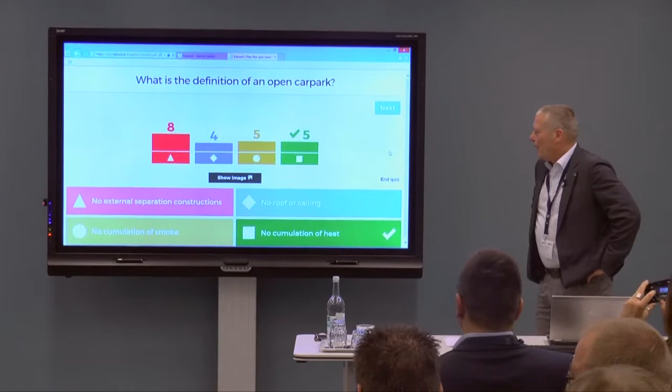Okay, well, most of you think, and that's not strange, no external separation constructions, because they are very much related to each other. No external separation constructions means also no accumulation of heat, of course, and maybe no accumulation of smoke.

I think my answer would be no accumulation of heat, because if we don't have accumulation of heat, then we can create boundary conditions that prevent a developing fire to develop to a flashover. So then we keep a localized fire, and that is much like a fire in the outdoor. An indoor fire is different from an outdoor fire because flashover could happen. If you can prevent flashover, well, that could be a definition of an open car park.

If you think about no accumulation of smoke, then you are thinking about personal safety, I guess. And well, that's also a good reason for a definition of an open car park. But then it's not the definition of the developing of a fire. Then you are thinking about personal safety and inhalation of smoke and visibility, etc. Okay.

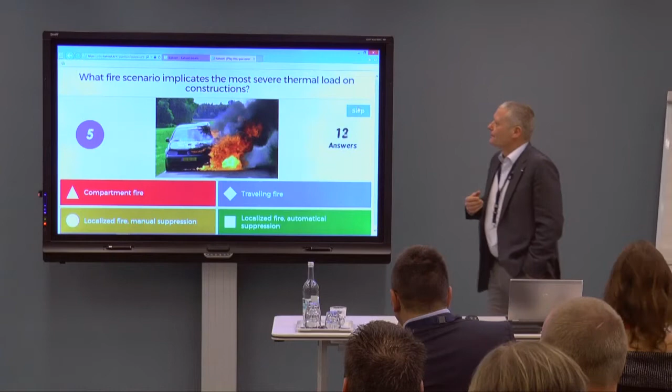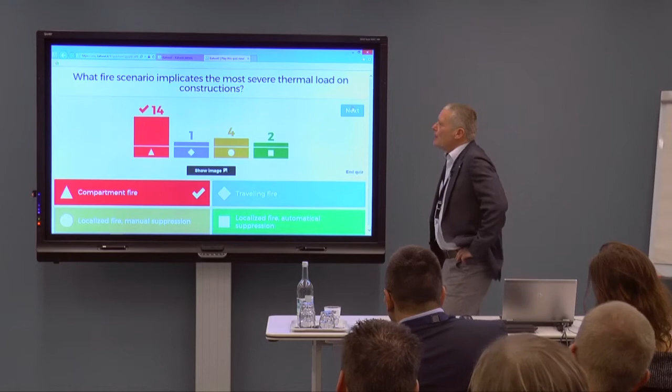Again, scoreboard. What fire scenario implicates the most severe thermal load on constructions? Well, here you see the same scenarios, but then in the localized fire, I made the difference between manual suppression and automatic suppression, compartment fire, traveling fire. Well, I'm curious about your answers. Time up. Not everyone managed that in time. Yeah, most of you think the compartment fire, and I think I agree on that.

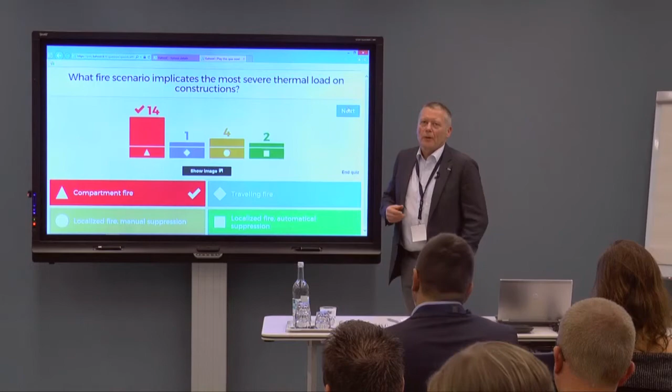The compartment fire is the most severe thermal load, not only when it comes to temperature and duration of the fire, but also because a large part of the construction is exposed to that thermal load. When you have to deal with a traveling fire or a localized fire, then only a small part of the construction is exposed to that thermal load. And that means that also the failure probability is much lower than when it's a large part of the load-bearing elements. So I agree on that, I think the compartment fire is the most severe thermal load.

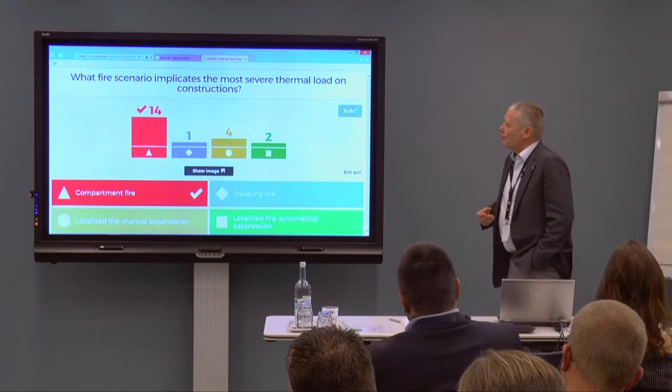Oh, again, scoreboard. The last question, what type of cars implicates the most severe fire scenario? The fire scenario is important because the rate of heat release, that's basically the engine of the temperature development in the compartment. Is it normal petrol or diesel cars, electrical cars, hydrogen cars or LPG cars? And, well, there are of course maybe some more types. I think this is a difficult question to answer. I find it a difficult question to answer, at least.

You see, I think we have to wait a few seconds.

That's not officially published yet, but from the research you could conclude, and there are 4 tests on 2 types of these cars, that the modern cars, electric, hydrogen, and LPG, are not more severe than the old cars. It's only more difficult. That's hopeful.

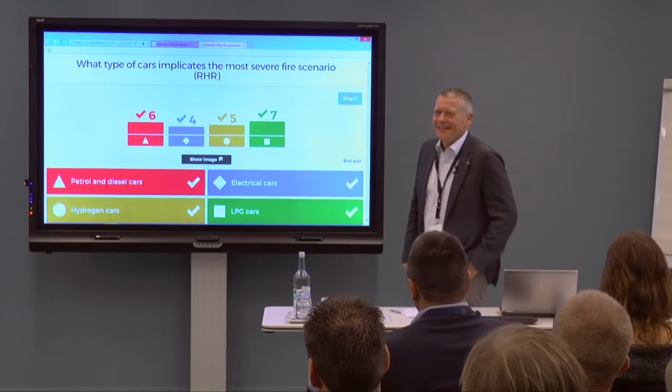Yeah, because what we saw this morning, I really don't know what's the most severe scenario. But if there are tests, not published yet, and those tests show that electrical cars, hydrogen cars, and LPG cars are not more severe in a fire scenario than normal petrol and diesel cars, well, I think that's hopeful, because then maybe we are now calculating conservatively. That would be nice.

So you are very divided, and that's for me too. I really don't know, because even if we think petrol and diesel cars give the most severe thermal load, we still don't know how the development in the future will be. We don't know how many plastics, how car design will be in the future. So there will always be a lot of uncertainty in the rate of heat release scenario.

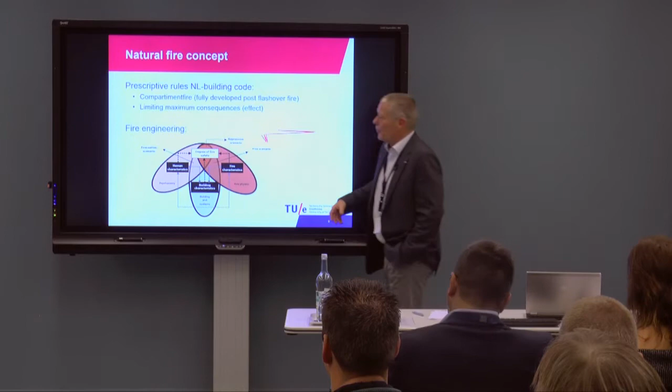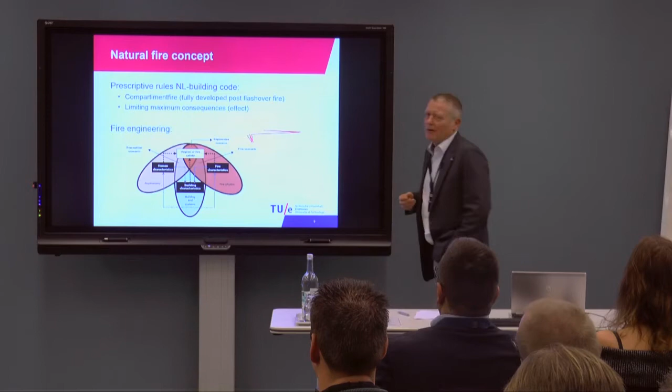Besides building characteristics and fire characteristics, of course human characteristics are also important: the physiological effects on skin, inhalation of smoke, etc., but also organization. That's especially important for personal safety. I think you understand that, and maybe you have seen this figure before. This is a popular picture showing what fire safety engineering is, that we have three kinds of boundary conditions that are important for a project-specific solution.

Oh, I have to do this.

Okay, then we go to the car parks. A car park is maybe a very simple building, but what we know in the building is the fire scenario, or more or less we know the fire scenario. And that means that this building type is especially suitable for fire safety engineering, because if you can define the natural fire, then you can engineer safety in a proper way.

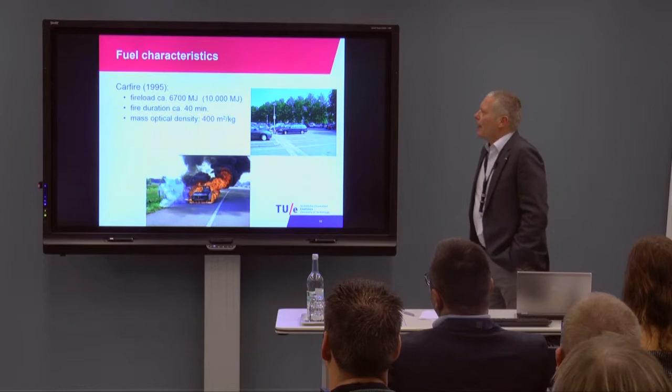Long ago I made a fire safety concept for NedCar. That was in 1995 in Born. In that time you had the Volvo 440, 460, 480, very old type, but then that was the standard mid-class car. And because they were assembling that type of car, they knew exactly what materials were in that car. So I could exactly establish the fire load of one car.

So this is a kind of mean value of the Volvo 440, 460, 480 as the fire load for one car, 10,000 megajoules. And that's not the fire load that we calculate when it comes to the fire scenario of a car. Because if we take a look, and that is the next slide, at the rate of heat release scenario, you see that the total fire load is less than 10,000 megajoules, approximately 6,700 megajoules. So that means that we have an efficiency of combustion of 67%.

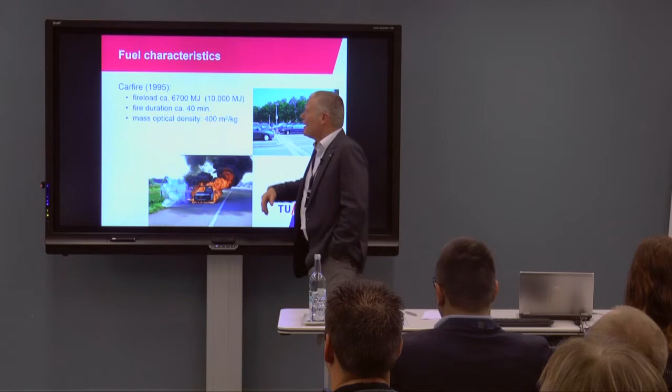So that's not a very high efficiency, but okay, maybe. So you can ask for yourself: is this a conservative assumption? I'm not sure about that. Fire duration approximately 40 minutes, and the mass optical density, so smoke production, of 400 square meters per kilogram.

And to make a comparison with normal building fires, in normal building fires we assume a smoke production, a mass optical density, of approximately 100 square meters per kilogram. So this is 4 times higher. But I think you can imagine why that is 4 times higher. That's because of the use of plastics and the tires of the cars that produce a lot of black smoke.

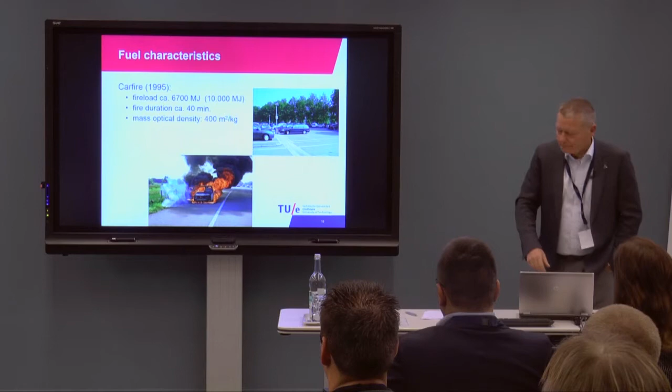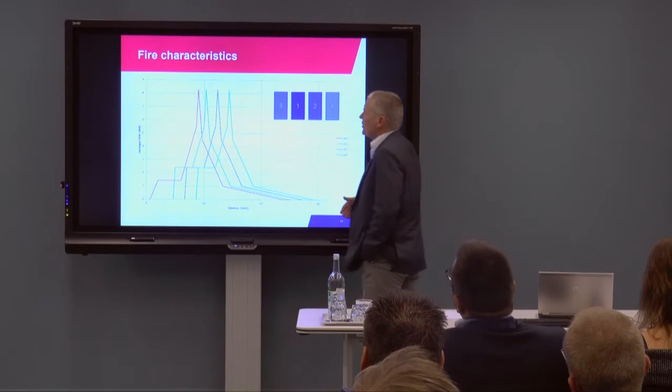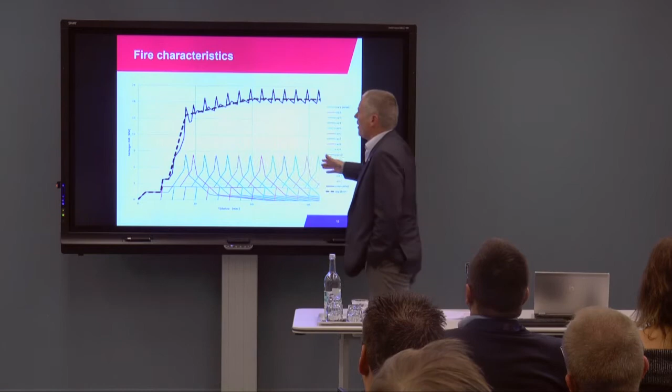So you see ignition of car 2, of car 3, with constant time interval. And if you don't put out the fire, then it won't be 4 cars, but maybe a complete row of cars that will catch fire, car after car. I can summarize those scenarios, and that's what I've done in this curve. It's basically the summarization of all those separate scenarios. The dotted line is basically the global rate of heat release, and what you get here is a kind of a traveling fire.

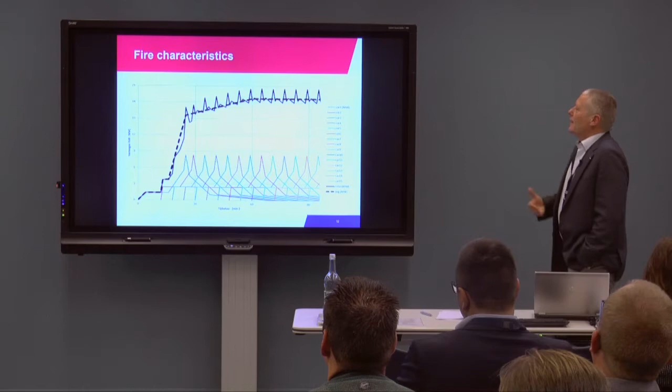So we see that car 1 is finished after 40 minutes, and at that moment we have 4 cars on fire, maybe already the 5th car, and that means that we have a more or less constant fire size of approximately 4 or 5 cars, moving through the row of parked cars, but more or less constant in size. After approximately 60 minutes, we have a constant rate of heat release. And it's a rather high rate of heat release, approximately 18.5, 19 megawatts. But that's the rate of heat release of a traveling fire.

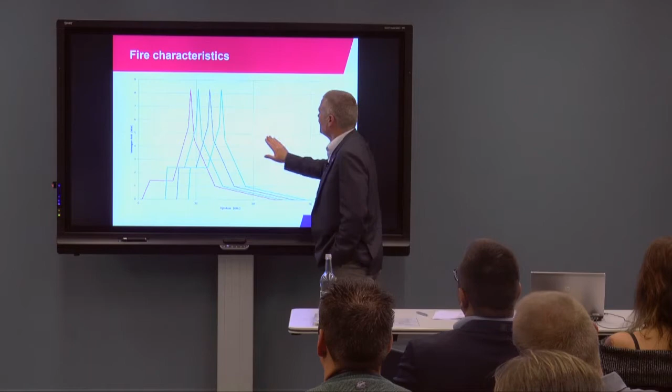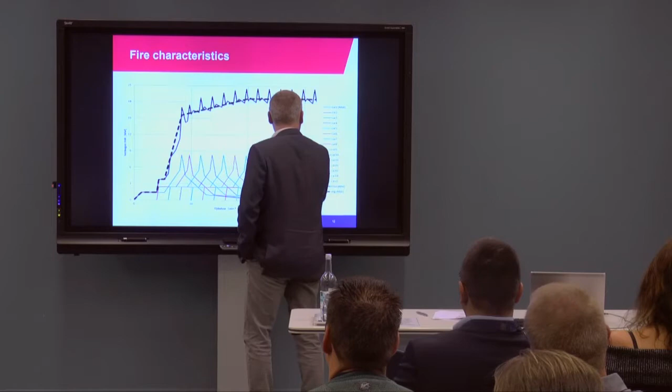Yeah. I'm going back now. That's not good. Yeah. What's the problem with that? Okay. I don't know. Is it the next sheet, or am I already 5 sheets ahead now? I don't know. Is it really the next sheet? Yeah, I think so.

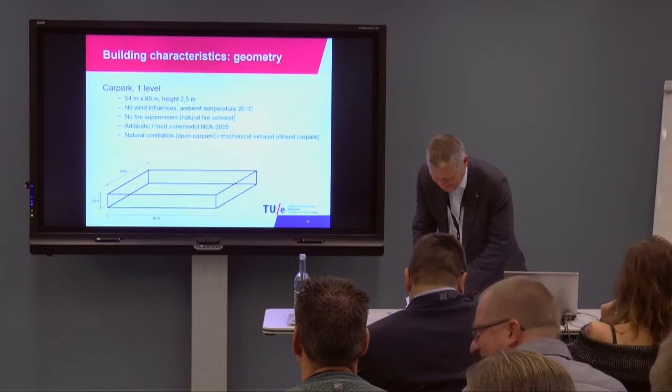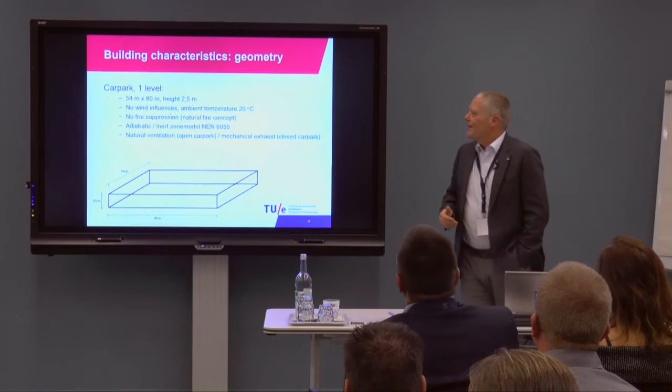Okay, so I have an example to show what the consequences of that rate of heat release are for different types of car parks. The geometry of the car park is very simple. It's a rectangular plan with a constant height. No wind influences, ambient temperature at a constant level. No fire suppression, which means that we follow the natural fire concept. So only the fire and the building are of importance. There's no suppression.

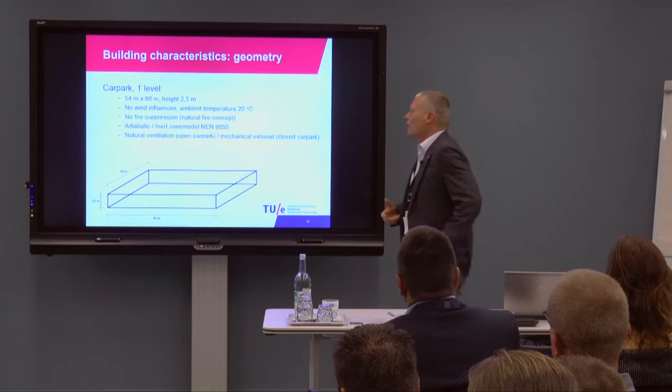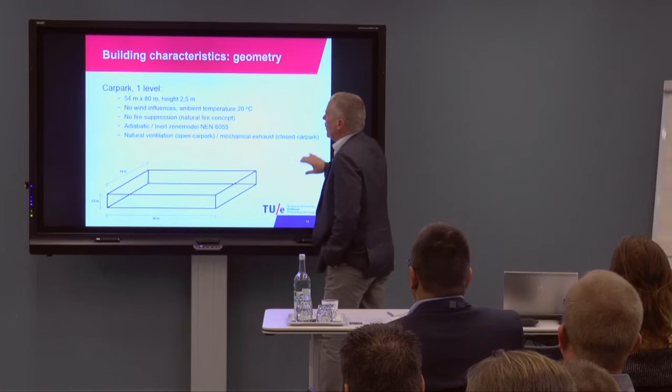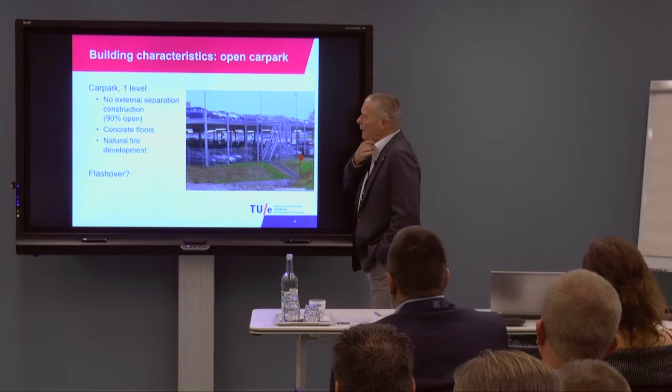I took 2 conditions: an adiabatic condition, that means a very light, very well insulated construction, compared to a very heavy construction with no insulation. And also 2 types of ventilation, an open car park compared to a closed car park. We did that with simple zone modeling. Of course that's a very simple approach, but I come to some special localized effects later.

This is an open car park. This is car park Jette in Brussels. It's basically floor above floor, and you see no facades, so no external separation construction, maybe 90% open. Concrete floors, natural fire development. First question: flashover or not? That's the question we already answered in the beginning. We don't expect any flashover here because the car park is too open.

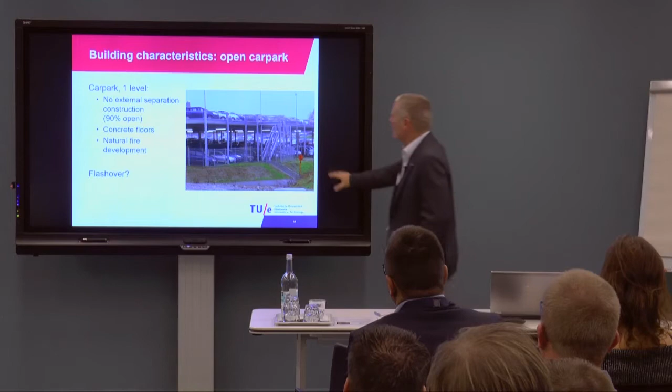Then you can ask yourself, well, is it possible in an open car park to do an offensive fire attack? That means that the fire brigade approaches the fire and puts out the fire. Well, here you see more or less the same graph, in the first hour in this case, and this is the temperature. That's the same as you saw in the graph before. Well, it's now in Kelvin, but that's okay. The same temperature, and I added the visibility line. That is this line, and this is related to the right axis.

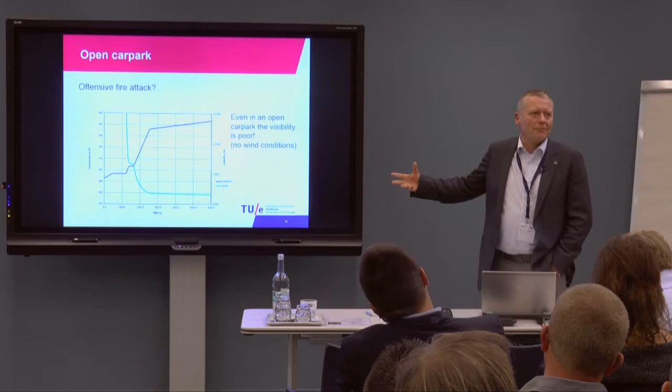So that means that a localized fire scenario in an open car park, in many cases, I think that is a bit too optimistic. I think a traveling localized fire is more probable than a local fire that can be put out by the fire brigade. But is that without systems included? Yeah. Results without systems included? Yeah, this is only the fire and the building construction. So there is no fire brigade, there is no sprinkler installation, there is no smoke ventilation, nothing. It's all natural.

And you see, if you think, well, in that very simple parking, is it possible to do an offensive attack to put out a fire? Not in this scenario, because the visibility is too low. Of course, there are also other scenarios. This is only a design scenario. That means that it's not always this scenario for the fire. It might be a lighter scenario, it might be a more severe scenario. In lighter scenarios, it may be possible to do an offensive attack. So we don't always have the same fire tactics, because we don't have the same fire every time. That's the problem in this case.

But we are very much thinking in only one concept. We are very much thinking of a parking where we reckon on an offensive fire attack, where we always do that offensive fire attack. It's not always possible. Because if there is wind and the wind is from the right direction, it might be possible to do an offensive attack. You don't know what the boundary conditions are, and you are depending on the boundary conditions whether you can do an offensive attack or not.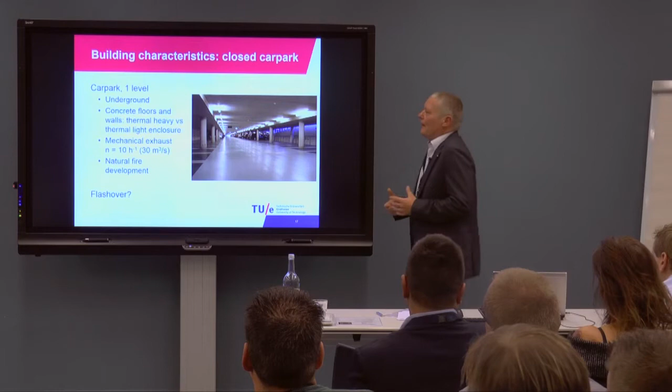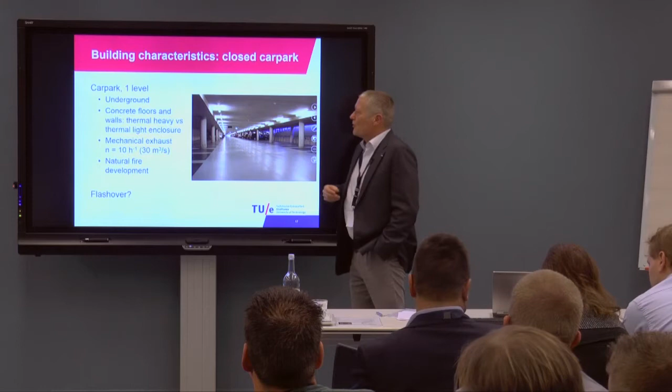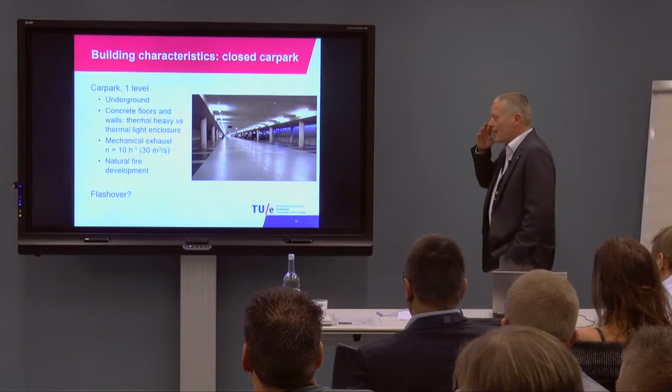The same fire, but now in a different car park. In this case, a closed car park, underground car park, a thermally heavy construction. That means that the gas mass in the parking cools down to the construction, and a kind of basic ventilation, mechanical exhaust of 30 cubic meters per second. That means 10 times ventilation, 10 times per hour. This is rather heavy ventilation system, and also a natural fire development.

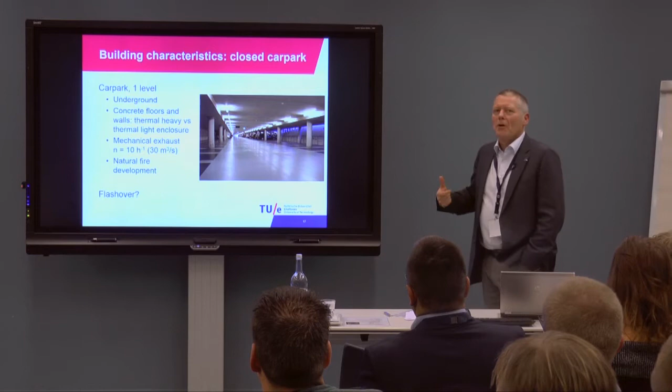Here the same question, the first question, flashover or not in this case? Well, here we were more divided. Some of you think flashover is possible, some of you think, well, I don't know, I think traveling fire. Well, let's see, with zone modeling.

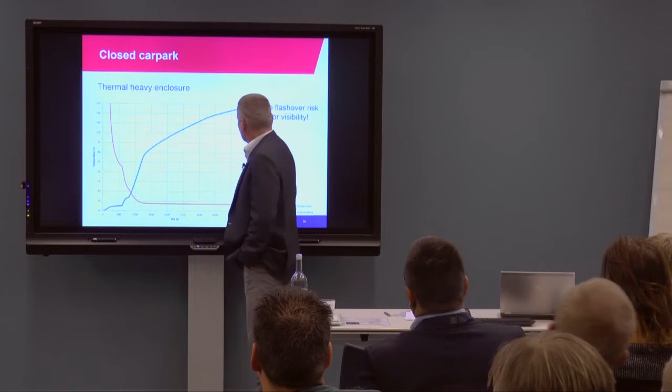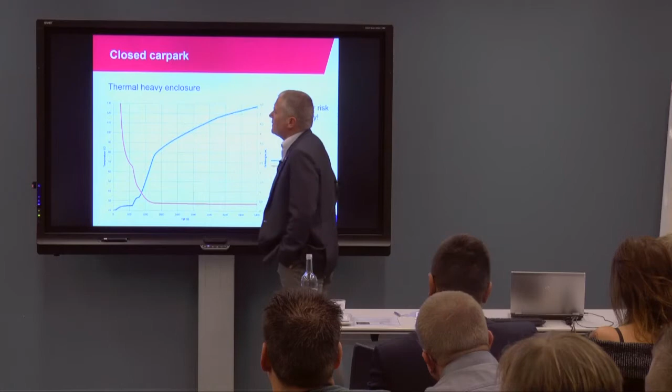You see here, what do you see here? Oh yeah, temperature. Okay, temperature. It's the same fire scenario, the same rate of heat release scenario. Here you see the temperature development, this line, and the temperature is on the left axis. Well, in this case, after 90 minutes, I'm at a temperature level of 128 degrees, something like that. So that's a bit higher than the natural ventilated car park, than the open car park. But still, it's not flashover conditions.

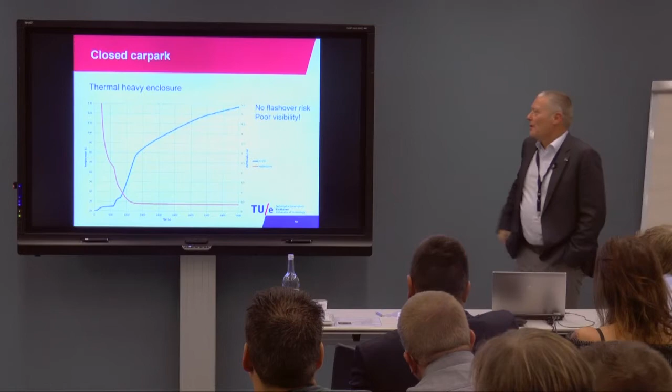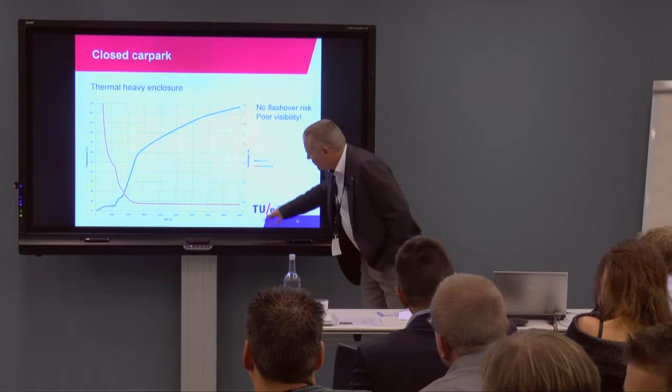So that means with this ventilation, 10 times per hour ventilation, we don't reach flashover conditions, and a traveling fire is the most probable fire scenario. Visibility, however, in this case is even lower than in the open car park. It's about 40 centimeters, 0.4 meter. So in this closed car park, with this scenario, an offensive fire attack is almost impossible.

Ruud, in both cases, the assumption is that the traveling fire is one car after another. And we both know that's not true. Why? Because cars move and all kinds of things are happening. Yeah. Not every car is moving when it's on fire. No, but that's possible. Just like the fuel on the floor, that's also possible. So it's what we call a design scenario. The real scenario is never exactly the design scenario. Sometimes it's lighter and sometimes it's heavier than the design scenario. You're right about that.

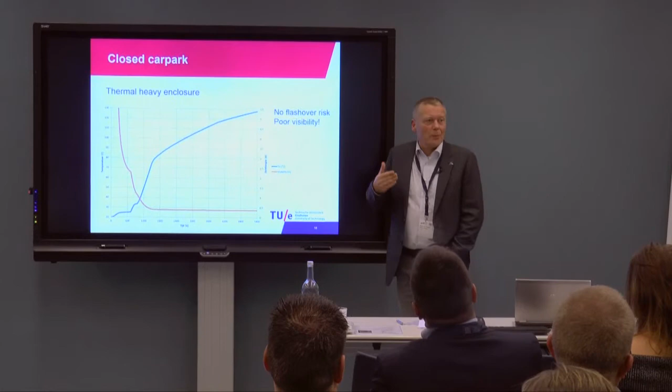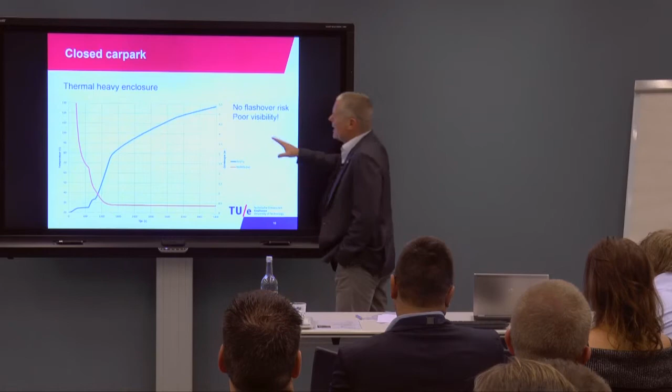So this is indeed the assumption that one car after another is ignited, and that we have in total 4 or 5 cars on fire at the same time. So you see, it's a bit worse than the open car park, but still, this is most likely a traveling fire, and we don't reach flashover conditions.

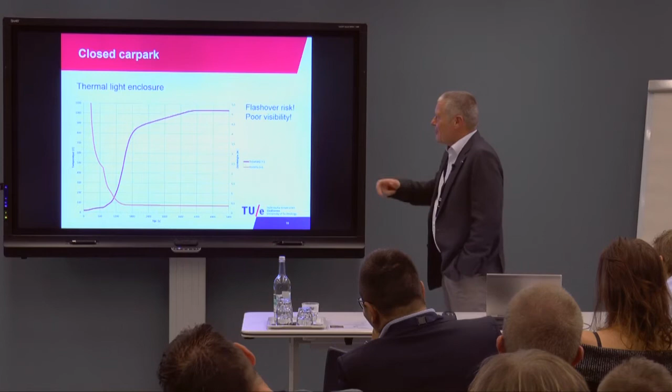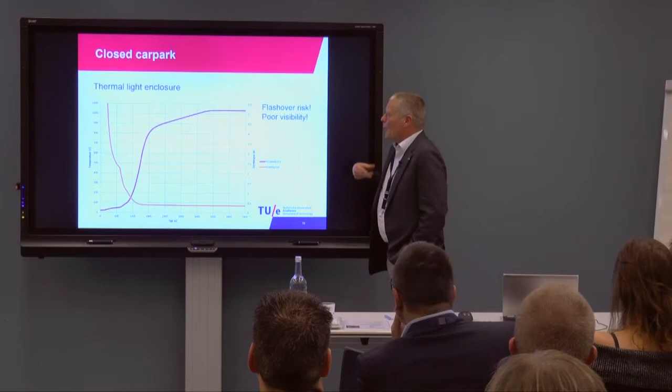Here I have the same car park with the same ventilation conditions, but in this case not a concrete car park, but a car park, if that would be possible, assembled from stone wool, something like that. So a very lightweight construction with a very high insulation. We call that an adiabatic calculation. That means that all the energy remains in the gas mass. So that's a very conservative assumption.

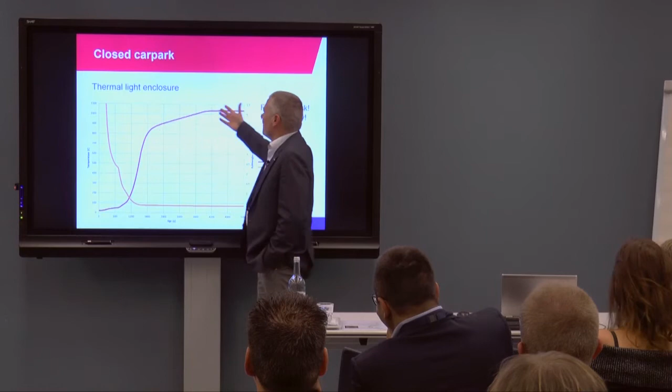And you see with that conservative assumption that the temperatures will rise enormously. In this case, flashover is probable in the range of 300 to 500 degrees Celsius. That's already after a quarter of an hour. So with the assumption of an adiabatic construction, it's not only poor visibility, there is also flashover risk. And it's good to realize that the flashover risk is not only depending on the rate of heat release and the ventilation scenario, it's also depending on the construction, especially separation constructions. Are they thermally heavy? Are they thermally light? Are they insulated or not?

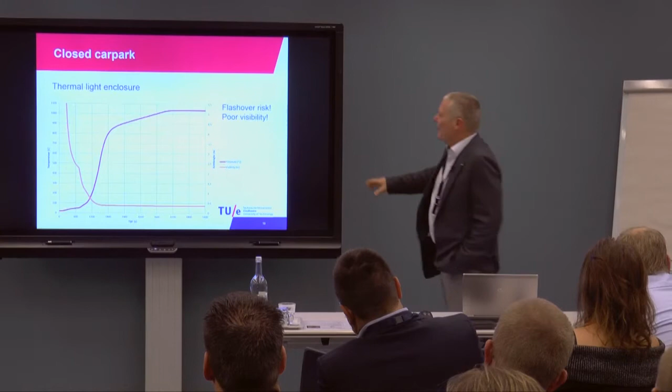Because if I have a thermally heavy concrete car park, but insulated with stone wool at the side of the car park, then it's basically an adiabatic construction, and then certainly there is risk of flashover. So you see that there are a lot of boundary conditions related to the fire scenario, and you don't know all those boundary conditions, and you cannot anticipate all of them. So you have to take into account several scenarios, not only one scenario.

An offensive fire attack, let's say a kind of summary is this slide, is possible automatically with a sprinkler or automatic fire suppression installation. I can do that manually with the fire brigade, but then I need to realize conditions in the car park that are suitable for an offensive fire attack. That means that I have to do something about smoke control, and I have to do more than only realizing sufficient ventilation. I also need to get rid of the smoke in a certain direction. So I have to create a smoke-free area in the car park or on that level for the offensive attack from the fire brigade.

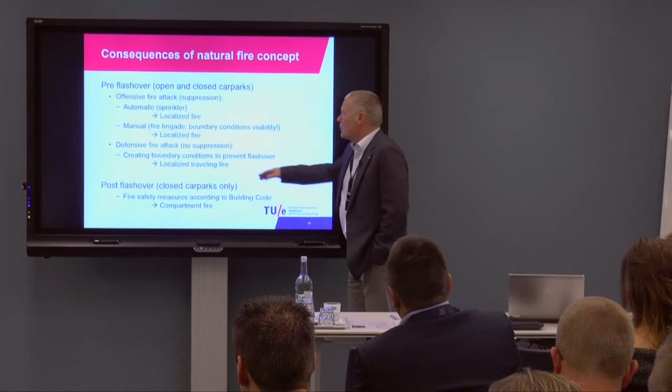And if that's not possible, then we go to a defensive fire attack. That means no direct suppression. We come to a localized traveling fire if we can create boundary conditions in the car park to prevent flashover. If that's not possible, then we get the last scenario. That's a compartment fire, and that's basically the scenario that fits best in the building code. That means that we also have to realize the measures according to the building code: 1,000 square meter compartment area, 60 minutes fire resistance, etc.

As I already told, there are a lot of uncertainties. Uncertainties in rate of heat release scenario. What kind of car? Rolf already said, well, maybe that's an uncertainty that's not, maybe if we know that petrol and diesel engines are, if that rate of heat release scenario is the most severe scenario, okay, then this uncertainty is less significant, but still there is a lot of uncertainty in rate of heat release scenario.

Also in smoke production, the mass optical density might be much higher in the future than now. Also about the calculations that we did with the zone model, because in that zone model we are talking about homogeneous mixed zones. And that means that we don't take into account local influences.

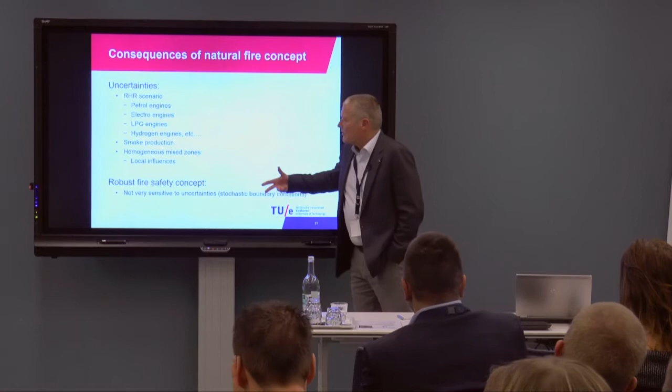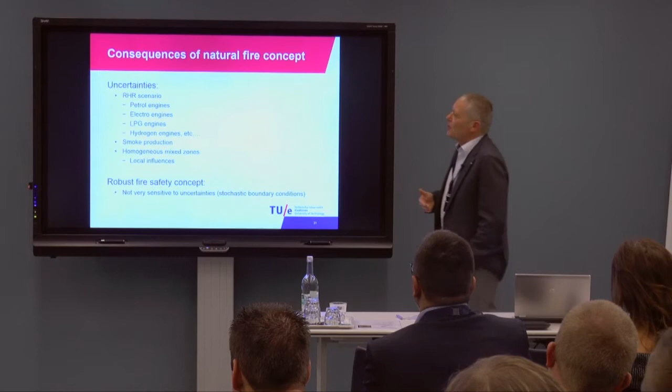Well, how can we realize a robust fire safety concept? We can only realize a robust fire safety concept if, with the sensitivity analysis, it's not very sensitive for those stochastic boundary conditions, those boundary conditions with uncertainties. So basically you have to do a sensitivity analysis to see if your fire safety concept is a robust concept.

So the local thermal load is of course maybe very, very high, but it's not that high as a compartment fire because the time of duration, the time of the thermal load is much shorter than in a compartment fire. And it's only one element in this case.

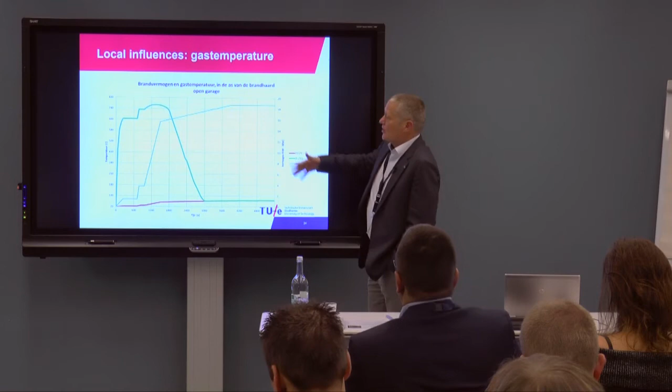So that's the thermal load of 3 localized fire scenarios. And here you see the thermal load on one element of a traveling fire. So basically this is the rate of heat release scenario in total for the traveling fire related to the right axis. And here you see the temperature axis, and this is the global temperature, the temperature of the mixed zone. So that's approximately 68, 70 degrees, the value that we have already seen before.

And here you see the temperature caused by the localized fire at one element, one beam or one column that's in this case in the fire axis. And you see that that might be very high temperatures, but not for a very long time.

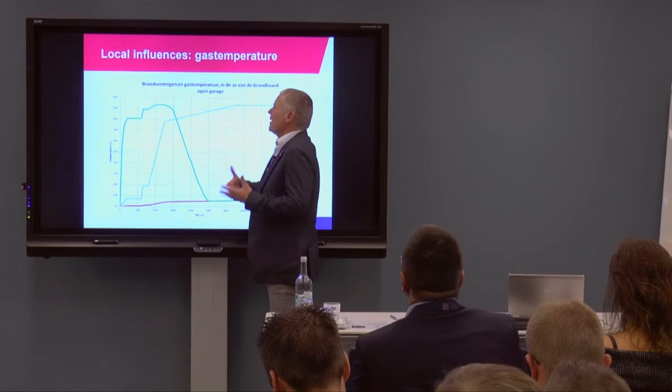So still there is a possibility to realize a robust fire concept, or realize fire-resistant load-bearing elements with another fire resistance than according to the building code. And that's because of the thermal load, in this case another thermal load than according to the building code, from the traveling fire.

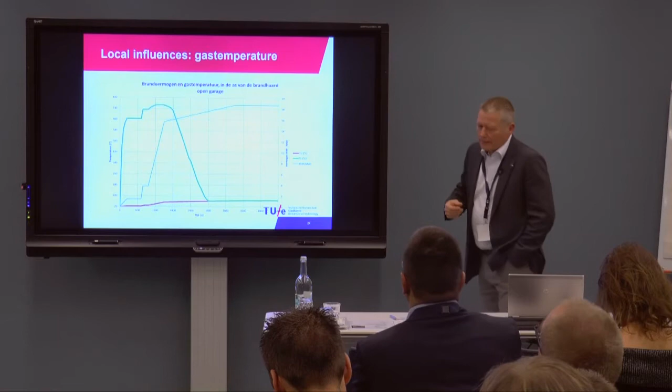Okay, when we can make sure that by automatic suppression or manual suppression by the fire brigade we have to deal with a localized fire, then the thermal load on elements is not only the lowest thermal load, but it's only related to one or a very small part of the load-bearing structure.

When there is no suppression and we have to deal with a traveling fire, then you see an increase of the thermal load, but also an increase of the part of the load-bearing structure that's exposed to that thermal load. And that means that we have an increasing failure probability of the load-bearing elements, especially when it's a large part of the structure. Then you cannot take into account any redundancy anymore.

Well, how do we deal with that? You can deal with that by decreasing the acceptable failure probability per element with a probabilistic analysis, or by a method that applies a risk factor on the rate of heat release, a method that's also related to the Eurocode, because in the Eurocode we do more or less the same. We apply a risk factor or a safety factor on the rate of heat release, or in Europe, basically on the thermal load. In Holland we do that on the rate of heat release. It's not quite the same, it's slightly different.

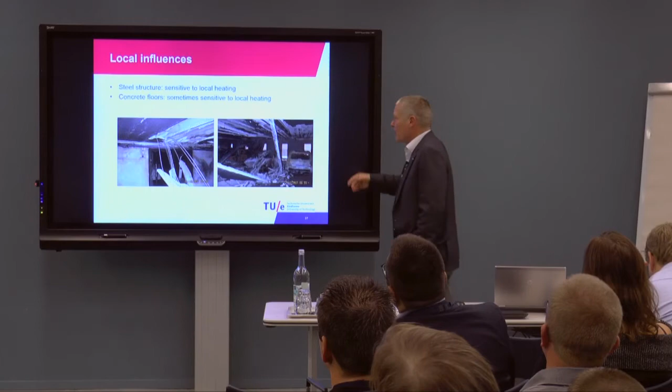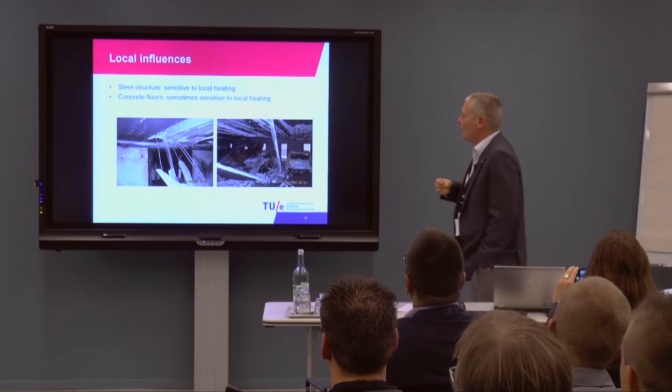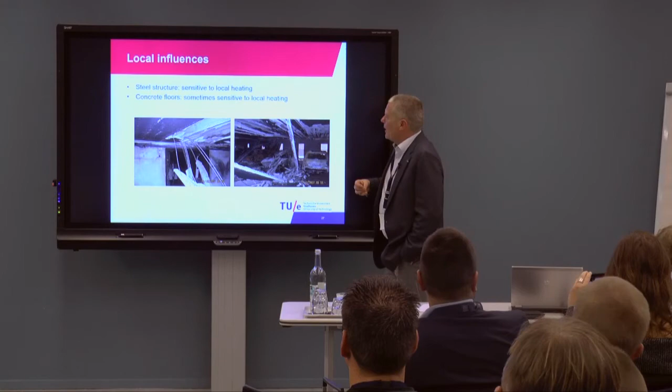But localized fires are important. Traveling fires are important for structural collapse, not only for load-bearing elements, but also for separating constructions, because I think most of you recognize these pictures from the car park Lloydspier, Rotterdam, where you see here concrete floors that are damaged in a severe way. So that means that we have a very high repair cost to realize a new floor here.

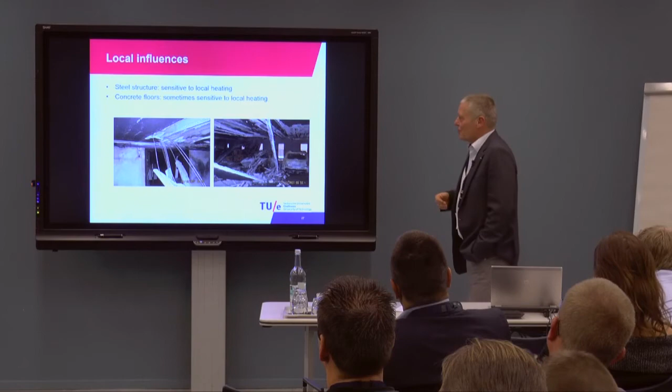So there are several constructions that are very sensitive to that high localized thermal load. Well, steel structures are sensitive to high thermal loads, but also concrete structures, in this case special concrete floors. Wooden structures, we already talked about that this morning, because then they're also burning. It's not only a structure, but it's also a structure that's burning, part of the fire load, you could say. So the localized fire is very important.

I don't know to what time can we continue? Almost. You have about 20 minutes left. 20 minutes left. Okay. Okay. Well, you're very quiet. Well, maybe.

But if the uncertainty is large, then for instance, when it comes to load-bearing elements, to the structure, you want to know if the structure can withstand the thermal load. If there is a lot of uncertainty in boundary conditions, then you need a larger interval between the source and the response. That means that instead of, for instance, 45 or 60 minutes fire resistance, you need 60 or 90 minutes fire resistance. So that's calculating with uncertainties. It's possible, but the larger the uncertainties are, or the more uncertainties, the larger the interval is.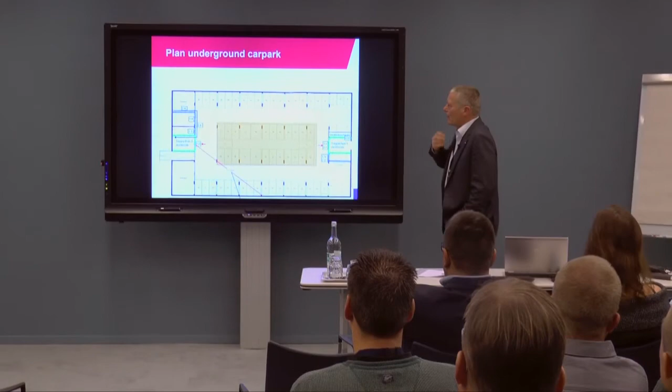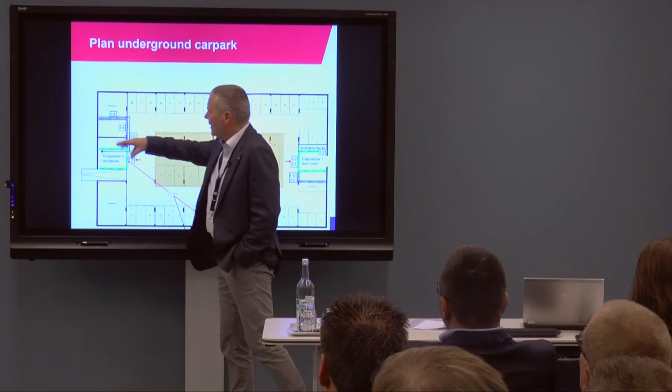It's an underground car park with one entrance, that's here, and it's a mechanical ventilation system, mechanical exhaust system. You see a ventilation shaft. I thought the ventilation was 10 times per hour, so it was rather a kind of fire ventilation. And well, that's it. I think it's approximately 2,000 square meters, something like that. The escape routes are at these places, and I don't know exactly what these are, but there are other compartments with another function than a car park function.

Because if you make a fire safety concept for a car park, and that's related to the rate of heat release of a car fire, then only cars are allowed in that compartment. So if you have bicycles, it may not be quite a problem, but if you have other fire load, that's basically not allowed in that compartment, because then you have another fire scenario.

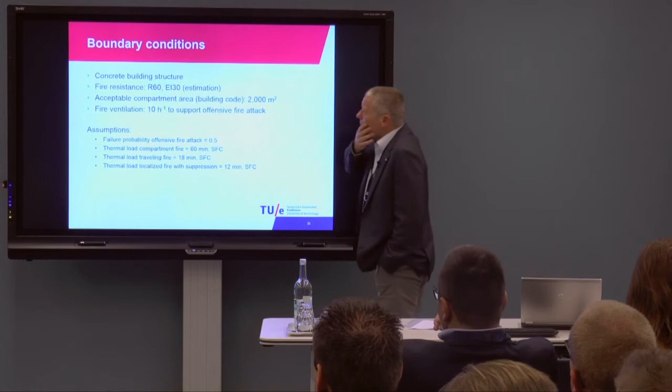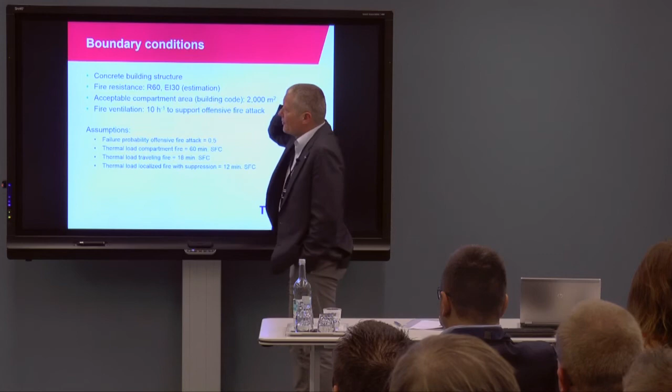Okay, it's a concrete building structure. We don't know exactly the fire resistance because it's an existing building, and I'm not quite sure if it's an estimation or if we know this is the level that is really available there. For load-bearing elements, fire resistance of the load-bearing structure, 60 minutes, and the fire resistance of separation construction, in this case the floor to the residential function above the parking, of 30 minutes.

This is an existing building. That means that the acceptable compartment area is 2,000 square meters, and here we find that there is a fire ventilation 10 times per hour to support offensive fire attack. So apparently offensive fire attack was one of the assumptions for this car park. But as we know already, with 10 times per hour, that's not enough.

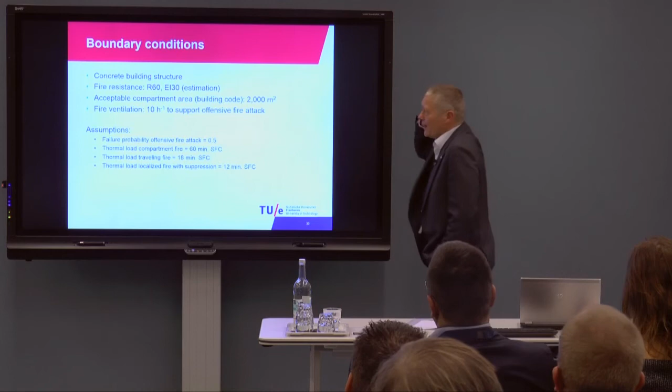You didn't see any thrust ventilation in the car park, only mechanical exhaust at one point. So we don't know much about the spread of smoke. So that means that 10 times per hour is not enough to support offensive fire attack. That's why I'm not sure if this is a realistic assumption, and that's why I thought, well, offensive fire attack is not the only relevant scenario.

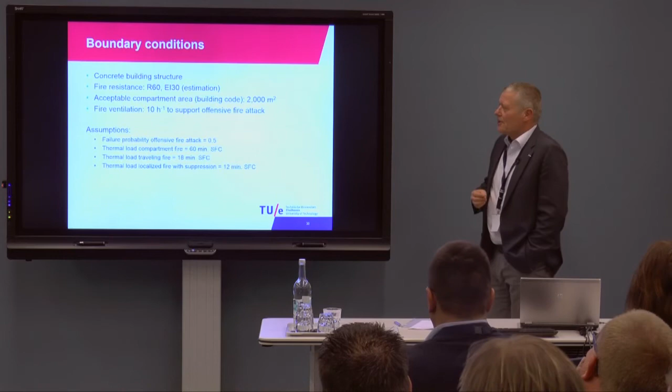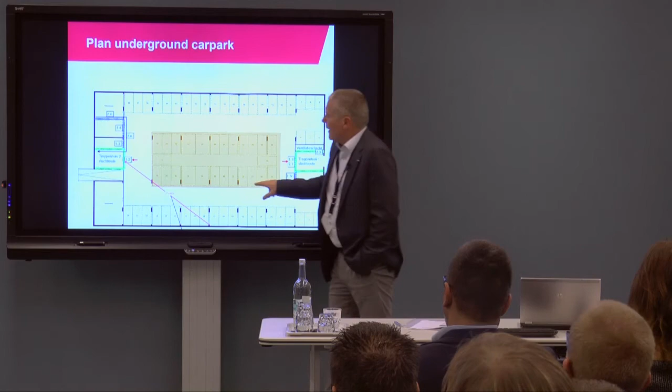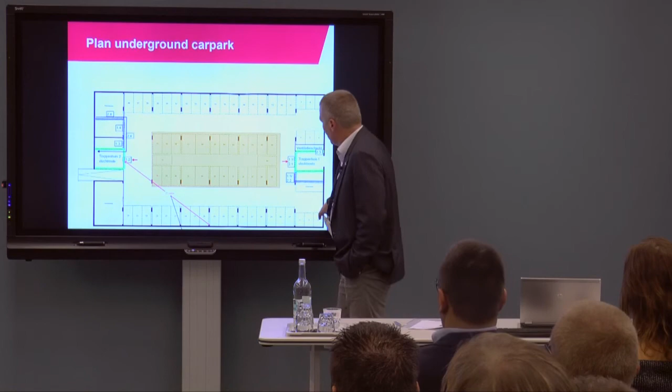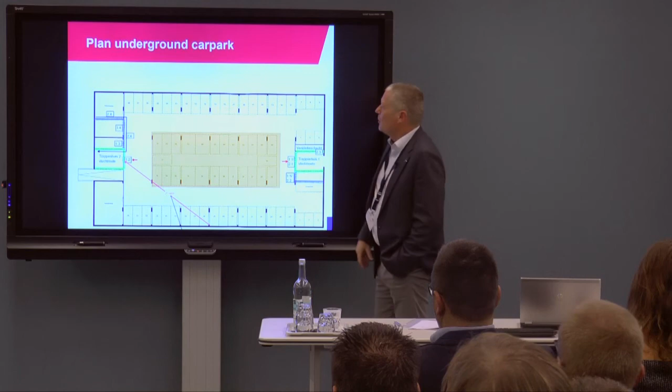Well, then you think, why 430 square meters? Well, in the traveling fire, if traveling fire happens in this center area, then I don't know exactly how many cars, but this is the most severe scenario, more severe than a scenario here at the facade, because this is the largest area. So for the traveling fire, we took that this will be the total damaged area in case of fire. And that's approximately 430 square meters.

A local fire has only 3 cars, 3 places, so that's a very small area. And a sprinklered fire, only 1 car, 12 square meters. Compartment fire, I don't know exactly this compartment, but I think approximately 2,000 square meters, maybe a bit smaller, I'm not sure about that. But the probability of that is 0, so I didn't fill in the compartment area. So these are the 2 most probable scenarios, traveling fire and localized fire.

And what I did was try to define a risk factor and translate the risk factor into a thermal load according to the standard fire curve. That's something Luke also mentioned this morning. He showed you a graph with the surface underneath a natural fire temperature compared to the standard fire temperature. And he said, well, if the surface is equal, then we can say that the natural fire has a certain time of standard fire, then we're talking about the same amount of energy. Because basically it was an energy equivalent. So I did that here too, and well, oh, I have to do that here.

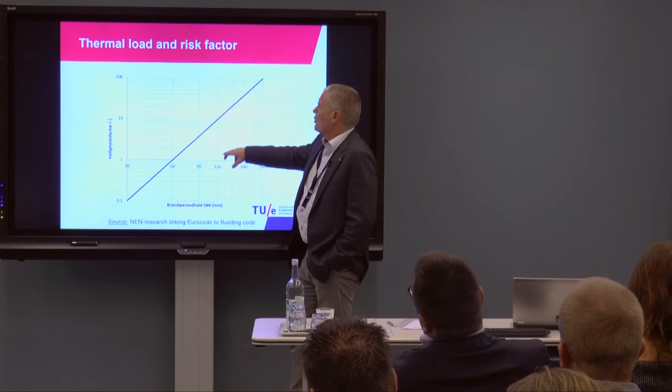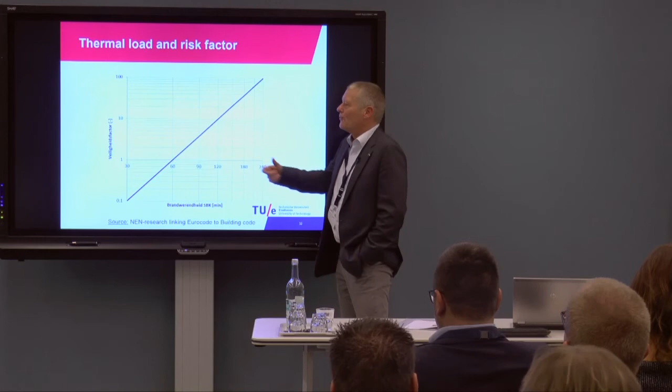Or in this graph, it's not thermal load and risk factor, but fire resistance and safety factor, but basically the same relationship. Fire resistance of 60 minutes means safety factor 1. Fire resistance of 120 minutes means safety factor 10. That means that the failure probability is, in this case, 10 times lower than in a 60 minutes fire resistant construction. That's basically the meaning of this graph. So, to do it here.

So that means that the risk factor, maybe I have to show it here, a risk factor of 0.12 means a probabilistic thermal load in minutes standard fire curve of 31 minutes. So therefore we use that graph. I can better show the graph, I think. I compared that with the requirements for existing buildings according to our building code and the requirements for new buildings according to our building code.

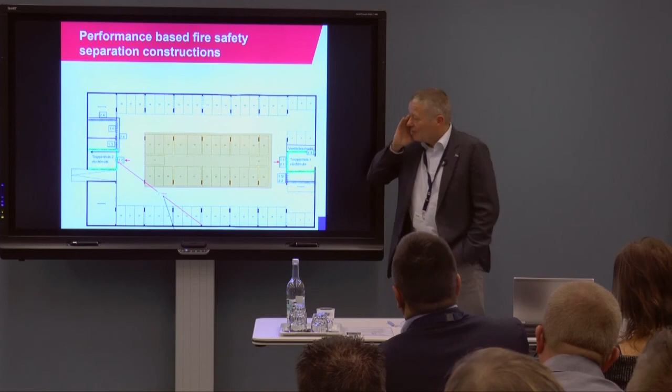Okay, so that was only an example, and I skipped this because this is new. This gives new discussion, and okay, we leave that. I stick to this. So this was the area of traveling fire. For that traveling fire, we need a ventilation of 10 times per hour of the volume of the car park, and then a fire resistance of load-bearing elements of approximately 60 minutes, slightly more, 62, 63, I don't know exactly, and 30 minutes for the floor, the separation construction. But then, of course, related to a traveling fire scenario, a car fire scenario.

Sometimes you see that the ceiling of a car park isn't of concrete, or that there is other material, also combustible material, at the ceiling. That might be a problem too, because if you have combustible material at the ceiling, then that could also be ignited by a car fire, and then the fire spread will be much faster than only the fire spread from car to car.